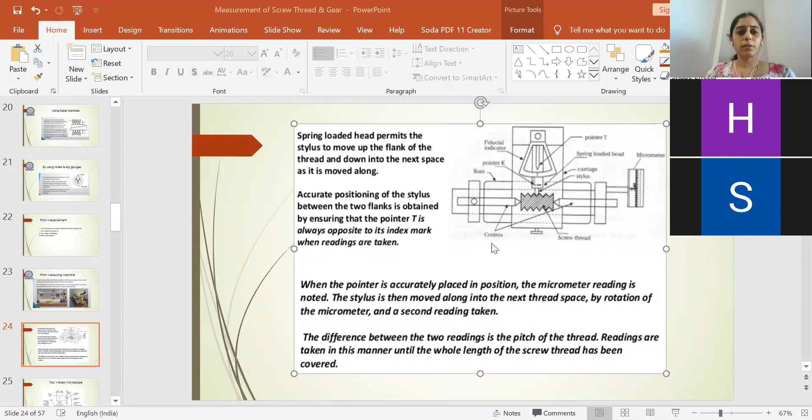So this is a pitch measuring instrument. Here we were discussing how it operates. Here you can see a spring loaded head. This spring loaded head permits the stylus, which is below the spring loaded head, to pierce in between the sides of the helical groove, so it can exactly touch the root part of the thread, because here we are measuring the pitch.

Pitch will be the distance between two adjacent threads, so you have to point out this distance, right? So this helps in piercing into the point which is needed. This stylus movement is possible with the help of the spring loaded head. After locating the position, it has to be accurately fixed. That is done with the help of the pointer. You have a pointer just above the spring loaded head.

So the accurate positioning of the stylus where we need to measure will be obtained between the two flanks, and then the pointer will be inserted inside it, so that the stylus has a grip in between the two flanks or straight edges. After doing this, when the pointer is pierced inside, the reading will be taken. So this is for the first position.

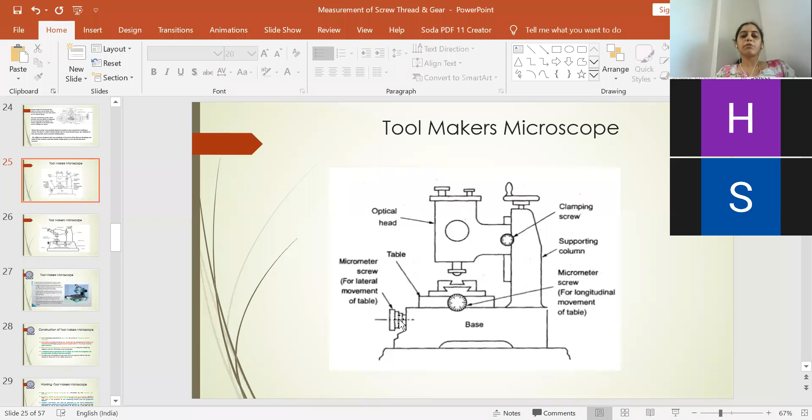So you have to align one of the threads to one of the cross lines, and then you have to take the reading. Then you will move to the other consecutive thread, align it and take the reading in the micrometer. So how are you traversing, whether lateral or longitudinal? Based on the movement you will take the reading on the respective micrometer. If you're traversing the work table longitudinally, you take the reading in the longitudinal micrometer, and if laterally, in the lateral micrometer, and you will see the distance you are measuring. That will yield the pitch value of the given screw thread.

So it could be a cylindrical object or a cone. The same thing is being explained here. The carriage moves due to the ball guideway mechanism embedded in it. It provides two measuring micrometers arranged perpendicular to each other in the length and cross directions. The measuring range of the micrometer is about 25 mm, and the measuring capacity can be increased if needed by adding slip gauges. This could be embedded if you need a range of more than 25 mm.

Next, a rotatable table is also provided over the stage on which the workpiece can be fixed either directly or between the centers. You have a ball guideway mechanism which helps in rotating the table as per the requirement, and it could be rotated up to 360 degrees, and the angular rotation can be read by using the fixed vernier to a scale value of 3 minutes. Okay, so this is the initial construction of the tool maker's microscope before operating. The working I have explained already.

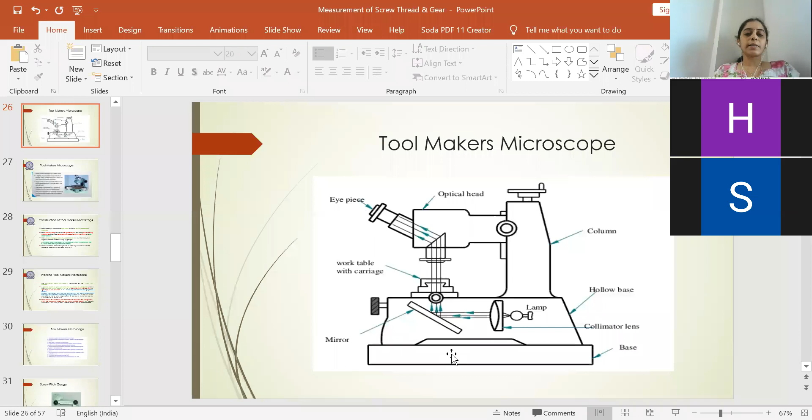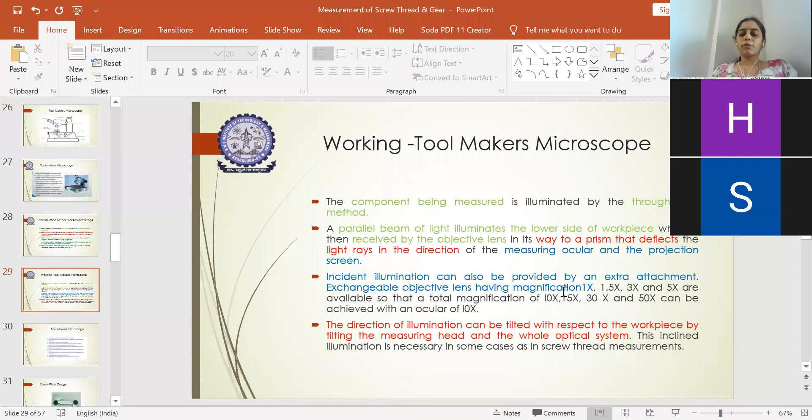Explain step by step how it is aligned, how the operations will be done, how the value of pitch will be determined, and you can also speak about the magnification lens and the accessories available along with it. So all these have to be explained clearly. Usually they ask questions related to the tool maker's microscope as well.

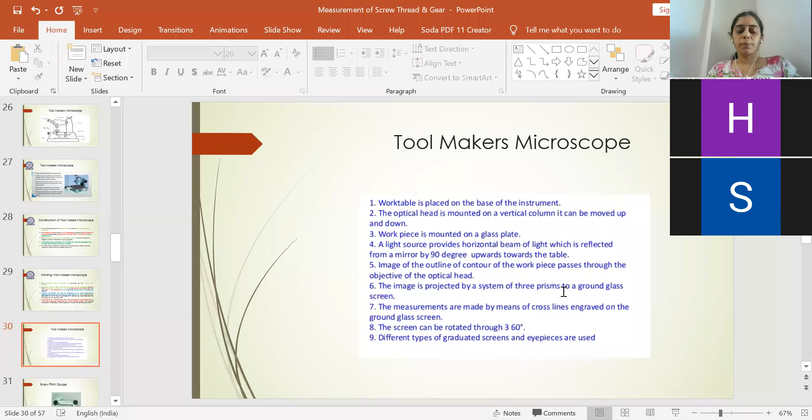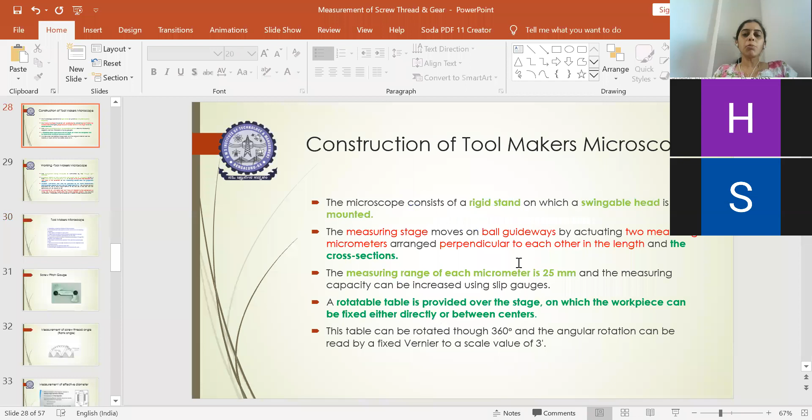So based on the requirement, this will be directly placed into the given screw thread and you can measure the dimension of the pitch. This is comparatively easier than the tool maker's microscope or the other one we use, the pitch measuring device. So these are the three categories of instruments available to measure the pitch value.

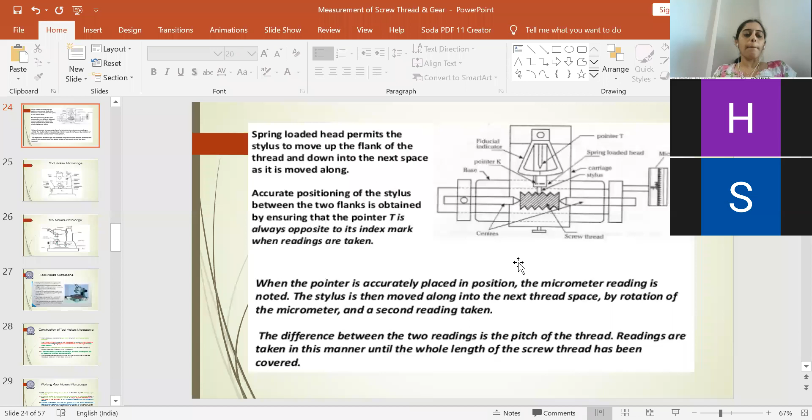So we measured the pitch value, and still the effective diameter or pitch diameter measurement is left out. That we will go to next. So this is a small part you have to understand. And also we need something to measure the flank angle. What is flank angle? These are the straight edges which connect the crest to the root. The angle made by the two straight edges connecting the root to the crest gives you the flank angle. We also call it the thread angle.

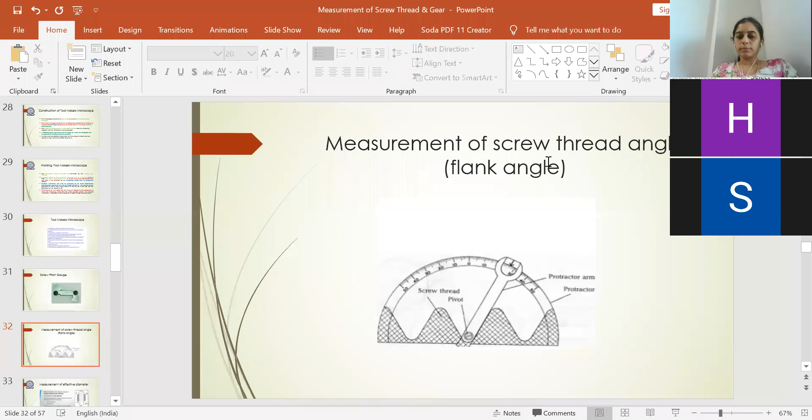The next important thing you have to understand very carefully is how to measure the effective diameter. Effective diameter is nothing but the pitch diameter. So what is pitch diameter? It is the theoretical diameter which will be exactly in between the major and the minor diameter. That pitch line will be parallel or coaxial to the axis of the thread.

So how do you measure that distance? The addition of the pitch diameter will provide you the depth of the thread as well. So it is an important task; one has to determine it very carefully. In order to determine the pitch diameter, we have two methods: one is the thread micrometer and the other one is the wire method.

In your syllabus you have different types of wire methods also, which are called the one wire method, two wire method, three wire method, and so on. In the wire method you will use the wire, make it like a ring, a circle, place it exactly in between the threads, and measure the effective diameter. In the thread micrometer, this is another procedure. I will explain how to follow both methods.

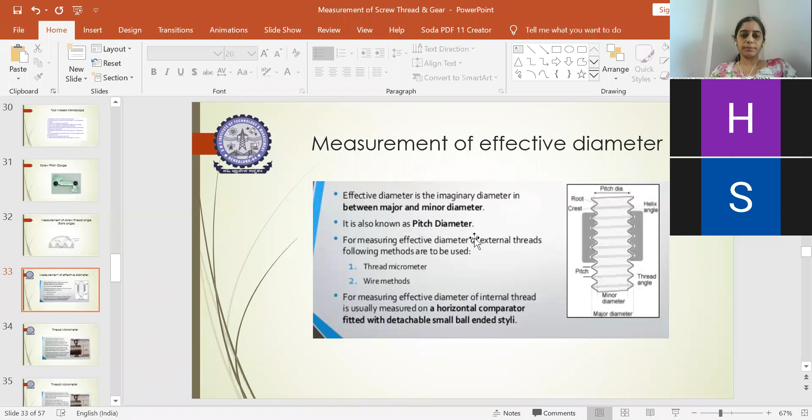The first one is the thread micrometer. Here you can see this is the screw thread. You will have the spindle at one end and the anvil at the other end. It will be aligned in such a way that this method is simple and could be done very easily. The thread micrometer is the same as the ordinary micrometer we were discussing, called a hand micrometer or a bench micrometer.

In the bench micrometer, we used to keep the standard, clamp it between the spindle and the anvil, measure the value with the micrometer, then replace it with a screw thread, measure the value and check any deviation. Similarly, here the same working principle is used, and a hand micrometer or a bench micrometer could also be used. The only thing is that the alignment position will be different to take the reading.

In this case, the contact points are selected on the basis of the type of the thread and the pitch of the thread to be measured. Depending upon what is to be measured, the contact point should be identified. Here we need to measure the pitch diameter or effective diameter, so one end, either the anvil or the spindle, has to be fixed on the female contact point and the other on the male contact point, so that it helps in getting the required pitch diameter.

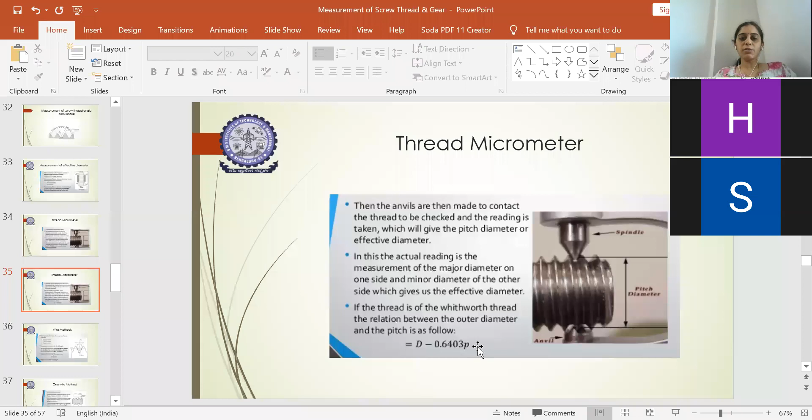If the thread is a Whitworth thread, the relation to determine the effective pitch diameter is D minus 0.6403 times the pitch. If they have provided a Whitworth thread, you have to use this formula: D minus 0.6403 P. So this was the thread micrometer method to measure the pitch diameter or effective diameter.

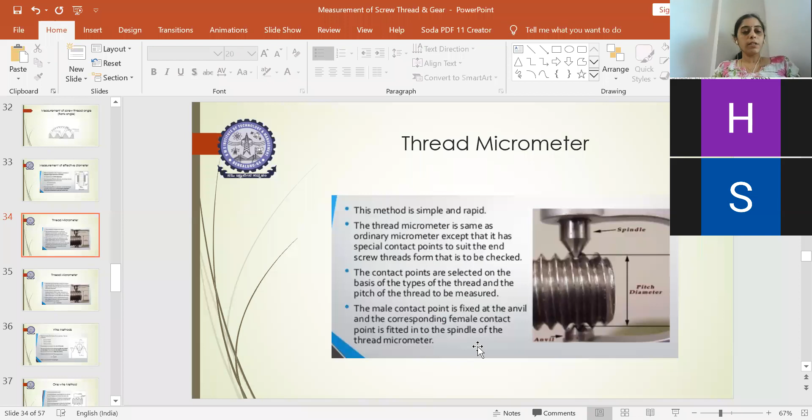Next you have to focus on the wire methods. These methods are also used to determine the pitch diameter. In this we have three classifications.